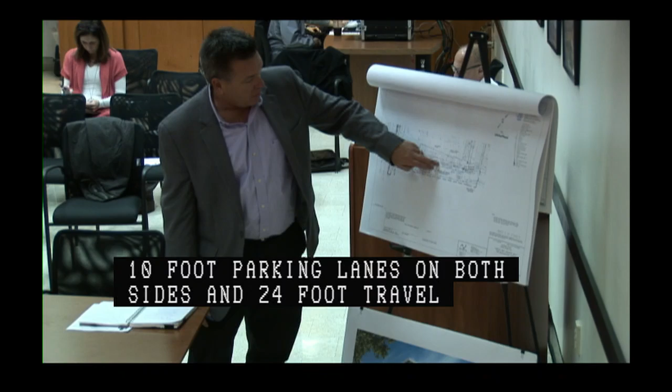John, can you talk about what the widening and relocation will allow with a little more detail? So in Fidelis Way, once we widen it, we will have about 38 feet of pavement, curb to curb. We allow 10-foot parking lanes on both sides and a 24-foot traveled way along the main drag. We are proposing on-street parking along our parcel and maintaining the existing parking on the abutter side, introducing some bump outs and other landscaping improvements. We'll have a concrete 6-foot wide sidewalk, and behind that, outside the private way, a series of landscape improvements and street trees.

Todd, since this is a private way open to public travel, I'm going to assume abutters on both sides of Fidelis Way have access to the fee ownership to half the street. Should the other side of the street be part of this petition, because this artificially changes the center line of the street? The BHA is the owner on the other fee side. So between the two petitioners, they cover the full limits of the center line of the street to the limits of what is being asked.

Other questions or comments on the widening and relocation? Todd or Avi? Members of the public? All right, I'll entertain a motion on this item. Make a motion to approve the joint petition by Avalon Bay Communities Incorporated for the widening and relocation of the existing right-of-way lines in Fidelis Way, as read into the record by the chair. All in favor? Aye. So moved.

Moving on to our next item, a joint petition by Avalon Bay Communities, Inc. and the Roman Catholic Archbishop of Boston for the acceptance of a pedestrian easement adjacent to Washington Street, a public way in Brighton, on its northeasterly side at address numbers 139-149 between Fidelis Way and Monastery Road. This was new business on November 7th, 2019, shown on a plan entitled City of Boston Public Works Department, Engineering Division, Pedestrian Easement Plan, Washington Street, 139-149 Washington Street, Brighton District, one sheet dated September 17th, 2019.

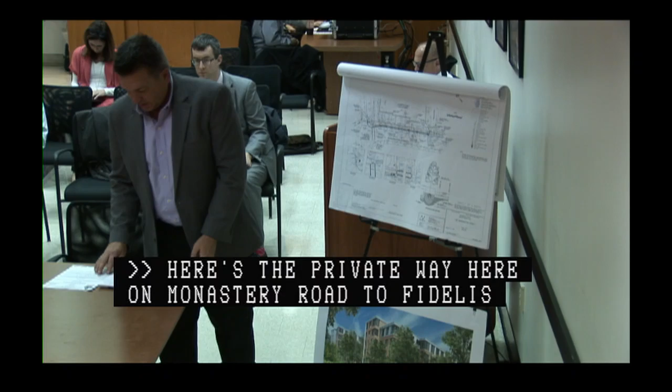This widening, this pedestrian easement, will run from the private way here, Monastery Road, to Fidelis Way, which is the private way. It's a 3-foot wide pedestrian easement, and this will allow us to reconstruct public sidewalks to allow a 13-foot sidewalk, 8 feet of which is concrete, and 3 feet will fall within that pedestrian easement. A 5-foot pervious tree pit along the edge of the curb line, and various other street improvements.

John, are there any bus lines that go down this street? Any MBTA bus lines? There are bus lines.

The reason I ask, obviously, is so that if there are any bus shelters needed to accommodate your clients, give some thought as to the appropriate location of a bus shelter that may be part of your project. I'm going to assume you are building new buildings over here or repurposing stuff.

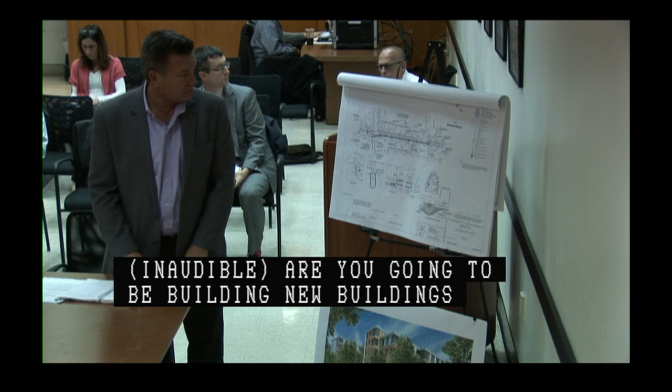Yes, we're building new buildings. Okay, so therefore you do have some room. So think about who your clients are, their vulnerability and needs for public transportation, and if they are temperature sensitive, meaning my age, I may need some shelter, so give it some thought.

I think as part of our community benefits package, there was, through the BPDA, some improvements to some bus shelters in the area. I don't think it was identified to do a new bus shelter, but the thought pattern can be, figure out where the most convenient bus shelter or bus stop location is, where stops can be consolidated, since adding one messes up travel times. So sometimes you can just adjust the location of a bus stop to have a shelter.

Other questions or comments on the ped easement? Any side items? Members of the public? All right, I'll entertain a motion on this item.

Make a motion to approve the joint petition by Avalon Bay Communities and Roman Catholic Archbishop of Boston for the acceptance of a pedestrian easement adjacent to Washington Street as read into the record by the chair, as shown in the plan entitled City of Boston Public Works Department, Engineering Division, Pedestrian Easement Plan, Washington Street, 139-149 Washington Street, Brighton District, one sheet dated September 17, 2019. All in favor? Aye. So moved.

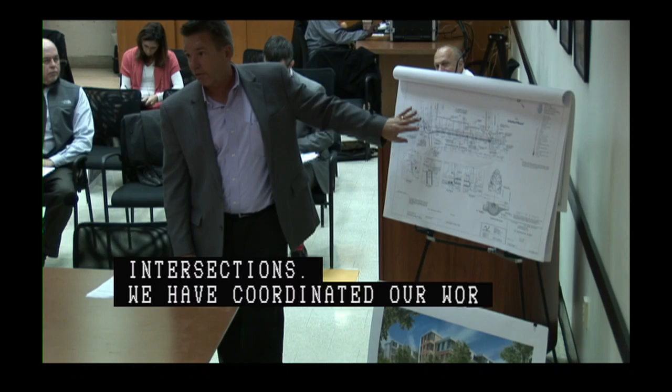5 feet of pervious pavers with a series of 6 new street trees, some minor street light relocation, and accessible crosswalks at all the intersections. We have coordinated our work with the work that's been previously approved by this board for the Cabot Fords project. That's all been coordinated and respectful of each other.

In regards to Fidelis Way, the private way, we are widening Fidelis Way on our side to provide on-street parking, as well as maintaining the existing parking on the other side of Fidelis Way. We have a concrete sidewalk that will run along the curb line, and we have a garage entrance here where we maintain a flush concrete sidewalk along the sidewalk.

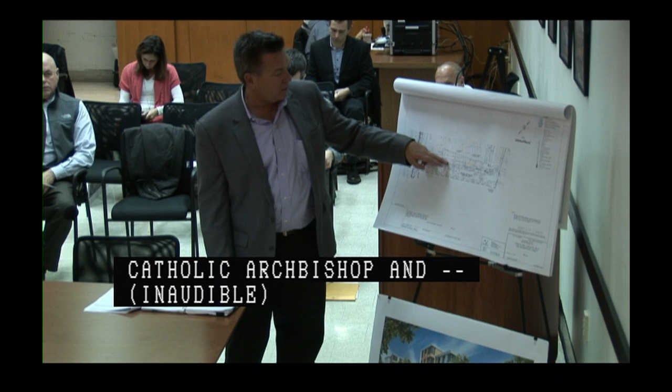And then at the intersections of the driveway that will serve the project as well as the BHA, we have a flush concrete sidewalk there too, as requested by the city.

We have some landscape tree improvements that fall outside the right-of-way, not street trees in the right-of-way. This has been reviewed and blessed by the BPDA, Parks Department, and Disabilities Commission.

John, you mentioned parking on the private way. Is that the right of the private way, not the city's, since we're not regulating or enforcing it? Correct, it's a private way. But are they deeded spots? I don't believe they're metered or deeded, so any person can park there, but the enforcement and regulation of those spots, unlike the spots on Washington Street, is yours.

Well, it's actually going to be the BHA's, because as part of our agreement with the BHA, we agreed to build those spaces but then sign them for BHA residents only, and all of our parking will occur within our building.

On Washington Street, what is the loading characteristic? Are you going to have on-street parking there? Guy Booth, Howard Stein Hudson, could you repeat the question? Do you have on-street parking on Washington Street? Oh yeah, Washington is currently Brighton neighborhood resident permit parking. It will remain residential. We're maintaining that.

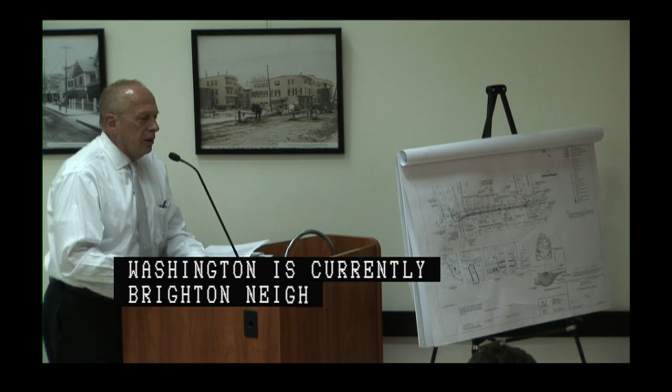And all the loading for the building occurs on site? Yes.

John, has the maintenance agreement been executed by the Archdiocese or the BHA? Who do we have the agreement with? So the license agreement will be with Avalon Bay.

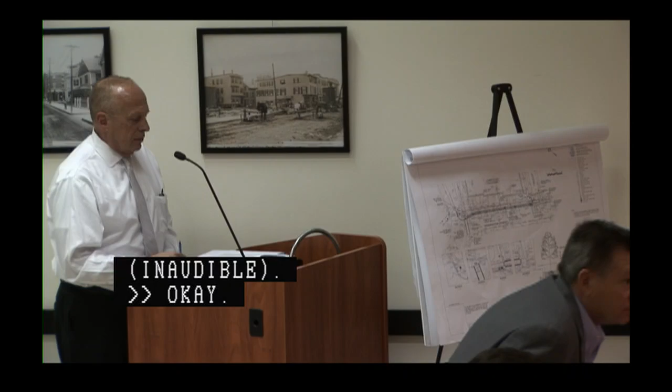I'll entertain a motion on this item. Make a motion to approve the joint petition by Avalon Bay Communities for the making of specific repairs within the following roadways in Brighton, Washington Street and Fidelis Way, as read into the record by the chair and shown on a set of plans entitled City of Boston Public Works Department, Engineering Division, Specific Repairs Plan, 139 Washington Street, Fidelis Way, Brighton, 3 sheets dated September 2019. All in favor? Aye. So moved.

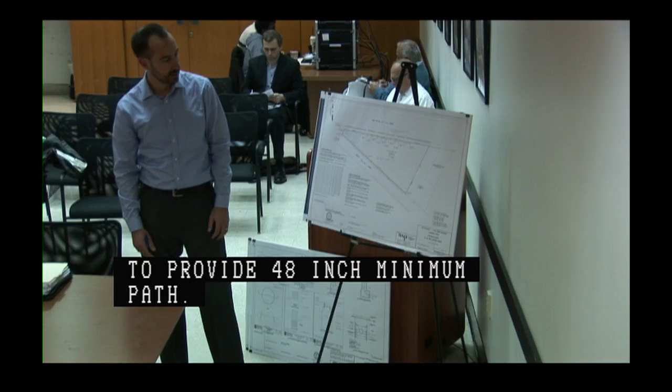The Athens Street pedestrian easement is basically to provide accessible width for the pedestrian path, maintaining the existing edge of pavement along the project, continuing to face the curb from the adjacent property, as well as the curb at the intersection, in order to provide a 48-inch minimum wide accessible path. We're providing an accessible easement on the property to achieve that. And then along West 2nd Street, where we have some trees proposed along the project frontage, we want to provide an increased accessible path up to 5 feet.

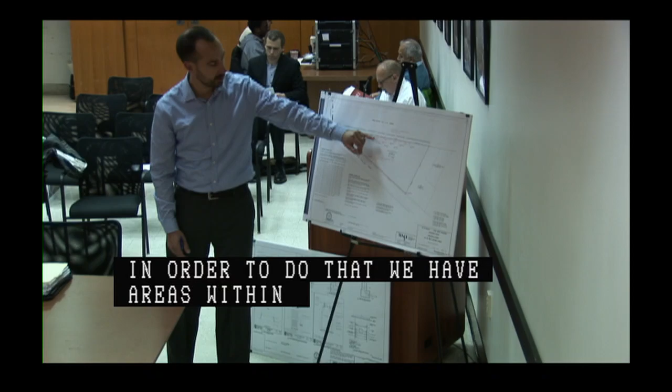So in order to do that, we have areas within the recessed part of the building where we have a sawtooth pattern, and we're providing a pedestrian access easement to provide 5 feet of continuous accessible width in those areas.

Sarah, I will defer to your expertise, but the part which I will disagree with you ever so slightly is that it is not a continuous 5-foot path, because if I walk that thing and if I'm blind, I'm going to hit my head 5 times with the sawtooth. So it is not a continuous path. But are you okay with it, Sarah?

Just to clarify, there is no building component that you're walking beneath in those areas where we're providing the access. I didn't see that clarification, so my bad. The tree pits are what bump out, right? The tree pits here along the frontage in the right of way are 3 feet wide as opposed to the continuous 2-foot band that we have. So walking along that pathway, that is the building. Correct. Okay, so the easement which you are giving us is not continuous. It would provide a continuous path, but it would be a meandering continuous path. That is, for a visually impaired person, as long as that's fine.

Yes, so Sarah Leong, Disabilities Commission. We work with the proponent as well with the BPDA and the Parks Department to ensure that there was an accessible path along the sidewalks and also accommodate parks requirements for tree pits. So it was a collaborative effort to find that extra space on the sidewalk.

Other questions or comments on the pedestrian easement? So I think this was addressed, but I just want to refresh my memory: is at the intersection of Athens and Second, there's a crosswalk there, correct? There is, yes. All right.

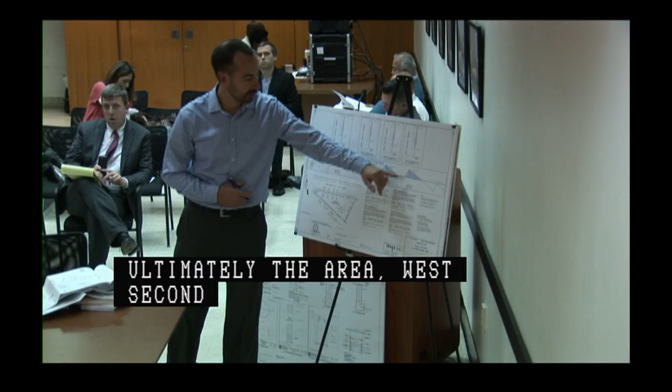The grade falls as you move westbound on West 2nd Street with a head height of 10-foot minimum at this location, increasing to a head height of 12 feet at this location. Fairly straightforward, four small encroachments, each of which are about 11 to 12 square feet each for a total square footage of about 45 square feet.

I just want to make sure we are meeting our standards, that it does not exceed our maximum standard for overhang on the sidewalk. Yeah, it's less than, all of them are less than 2/3 to the sidewalk.

Okay, and can you just show the rendering again, just to walk us through what the red sections are? Sure. So what you have here behind the trees, you have these 1, 2, 3, 4 undulations, I believe, that'll partially hang out for a distance of about 3 feet, which is roughly this wide, out to the public right of way.

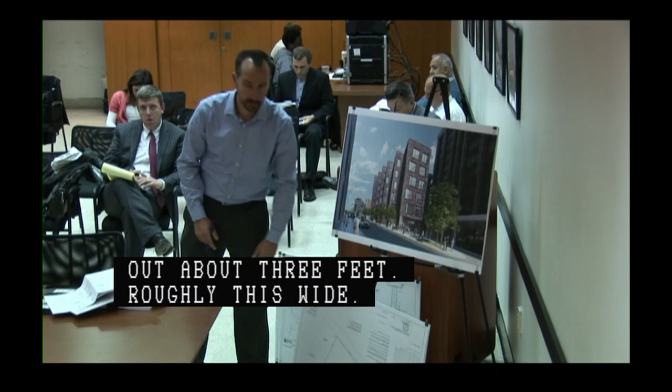Other questions or comments on the vertical discontinuance? Todd, Robbie? All set. Good. All right, members of the public? All right, I'll entertain a motion on this item.

Make a motion to approve a joint petition by Zero Athens LLC and the Boston Planning and Development Agency for the vertical discontinuance of portions of West 2nd Street, as read into the record by the chair and as shown on a set of plans entitled City of Boston Public Works Department, Engineering Division, Vertical Discontinuance, 21-35 West 2nd Street, South Boston, one sheet dated July 11, 2019.

Second. All in favor? Aye. So moved. Moving on to our next item, on a petition by Zero Athens LLC for the making of specific repairs within the following public ways in South Boston, consisting of curb and sidewalk reconstruction, as well as new and relocated specialty pavements, street trees, storm drain infrastructure, and driveway curb cuts.

Locations are West 2nd Street on its southerly side at address numbers 21-35 east of Athens Street, and Athens Street on its northeasterly side southeast of West 2nd Street. This was new business on November 7th, 2019, and this is shown on a set of plans entitled City of Boston Public Works Department, Engineering Division, Specific Repairs Plan, Athens and West 2nd Street Apartments, 21-35 West 2nd Street, South Boston, 3 sheets dated October 3rd, 2019.

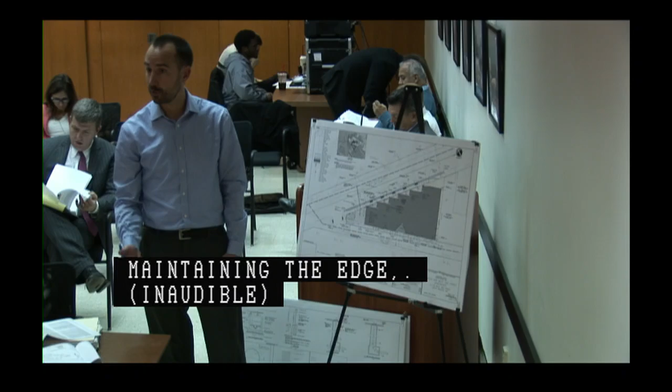We're maintaining the edge of pavement along this edge, installing new vertical granite curb where there currently is none. Under existing conditions, it's essentially just one wide open parking lot entrance with no curbing, no delineation for access. We're formalizing that with new curb, new sidewalk, with 2 flush curb entries into the loading area, as well as a small parking area in the rear, flush access to those locations.

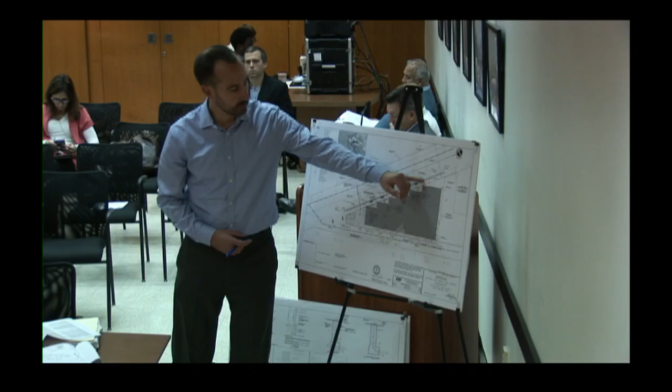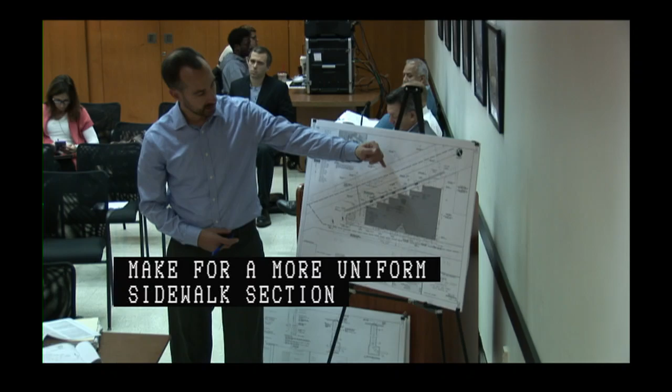Along West 2nd Street, we're proposing to remove and reset the existing granite curb. Right now, there's one existing driveway entrance into this entirely paved parcel today. We're going to be closing that off to make for a more uniform sidewalk section along the frontage there. As we briefly touched on before, there's going to be a 2-foot wide impervious paver strip continuous along the frontage. We're proposing 5 new street trees, as well as a landscaped area on the private property at the tip of the project.

Again, it's going to be a continuous ADA accessible path with a 5-foot minimum along the frontage, providing entrance access into the residential component, as well as a commercial space located roughly in this portion of the project. There's one entry there, one entry there, all continuous ADA access along the frontage.

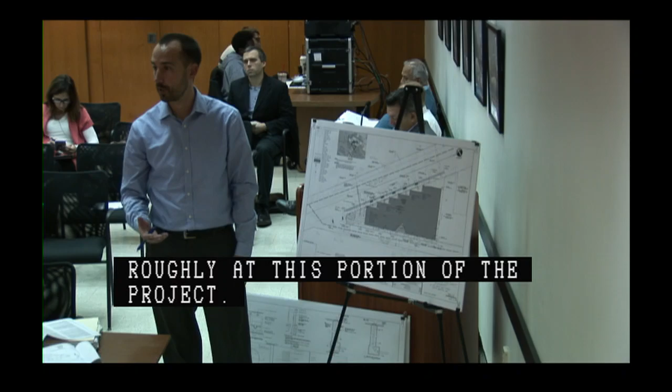We also heard from Boston Water and Sewer Commission just here today. They had one minor comment, and they're going to be ready to sign on the plans too, so they're comfortable with the design that we have.

From a stormwater perspective, we did touch on it last time, but we do have a distribution pipe running along the frontage of the site that provides stormwater to on-site recharge facilities located on the private property, designed to meet the Boston Water and Sewer Commission requirements.

We touched briefly last time on the alley on the eastern side. What sort of gate are you using? I don't know if the material's been picked yet, but there would be gates at both sides purely for maintenance access. It would be closed off, so it wouldn't be accessible for the public to walk through.

Again, we talked about is it 55 units? 55 units, no parking other than 2 zip cars. Can you just go over the public process on that? It's not necessarily a zip car because it's for the building itself, so it's a private car share service only for the residents. It wouldn't be publicly accessible.

During the process, because of the unique site constraints and concerns about being able to fit any cars in there, this was seen as an alternative that was discussed at length with the neighborhood and the community. Ultimately, given the site constraints and the location directly around the corner from the Red Line train station, the car share service was approved and supported by the elected officials and by the mayor's office.

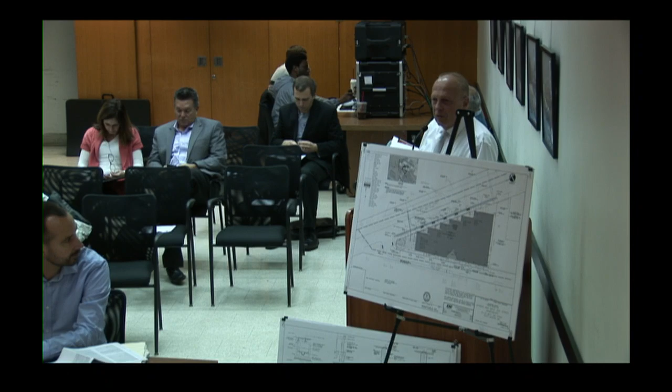I think I asked this last time — the construction management plan, we know we have to do it. That's one of those items we'll prepare as we move forward and submit for the record. Who's preparing that? Howard Steinmetz. Mr. Busa, anything to add? No. You were supposed to say it'd be in 3 days — Mr. Hesford will have it in his hand. We're working with Neil and his group on a construction schedule, and that's the last thing we're waiting on before submitting it to you. So it's pending. Thank you, sir. Thank you.

Other questions or comments? Todd Robbie? All set. Members of the public?

I'll entertain a motion on the specific repairs plan. Motion to approve the petition by Zero Athens LLC for the making of specific repairs within the following public ways in South Boston, consisting of curb and sidewalk reconstruction, as well as new and relocated specialty pavement, street trees, storm drain infrastructure, and driveway curb cuts, as read into the record by the chair, and shown in a set of plans entitled City of Boston Public Works Department Engineering Division Specific Repairs Plan, Athens and West 2nd Street Apartments, 21 to 35 West 2nd Street, South Boston, 3 sheets dated October 3rd, 2019, with the caveat that we'll formalize a MOU on the resident parking restriction and provide the CMP. Second. All in favor? Aye.

So moved. Moving on to our next item, a petition by Zero Athens LLC for the granting of a projection license for the installation of a canopy over a portion of West 2nd Street, a public way in South Boston, on its southerly side at address numbers 21-35 West 2nd Street. This was new business on November 7th, 2019, and is shown on a plan entitled City of Boston Public Works Department, Engineering Division, Canopy License, Athens and West 2nd Street Apartments, 21-35 West 2nd Street, South Boston, one sheet dated October 3rd, 2019. Again, Carlos Sculti with CEC for the applicant. So what we have here is a canopy, 5 by 8, essentially at the residential entrance to the project, at the easterly end of the building. It projects approximately 3 feet out into the right of way, provides 11 foot... 10 feet of clear space below, and is pitched backwards towards the building. The drainage will be routed internal to the building, and it's going to be heat traced as well.

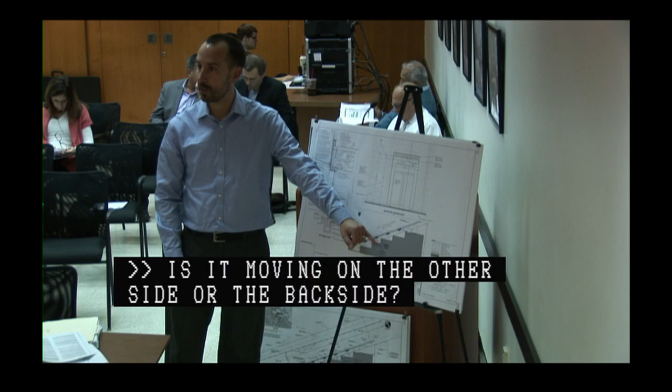All moving in and out of your building deliveries, is it from the main door or do you have a side entrance from the back? Deliveries, if I'm moving into the building, furniture coming in — the loading will be from the managed backside. So this is primarily for people just coming into the building.

Questions on the projection license? Todd Robbie? Members of the public? All right, I'll entertain a motion on this item.

On agenda item 8, I make a motion to approve a petition by Zero Athens LLC for the granting of a projection license for the installation of a canopy over a portion of West 2nd Street, as further described and read into the record by the chair.

All in favor? Aye. So moved. Thank you so much. Thank you.

Moving on to new business, our first item, citywide adoption of a policy for climate resilience on a joint petition by the Boston Planning and Development Agency and the City of Boston Public Works Department.

Good morning, my name is Katie Cho, I'm the Chief Engineer for the Public Works Department. Joe Christo, Senior Resilience and Waterfront Planner at the BPDA. As a Climate Ready Boston initiative, we are here this morning to ask the Public Improvement Commission to adopt a policy for climate resilience.

Climate Ready Boston is the city's initiative to develop resilient solutions to prepare Boston for the impacts of climate change, rising sea levels, extreme heat, and weather events. Identifying impacts that involve the public right-of-way is a critical first step in implementing the Climate Ready Boston vision. The policy for climate resilience arose from the development of the City of Boston Resilient Design Standards and Guidelines for the protection of the public right-of-way.

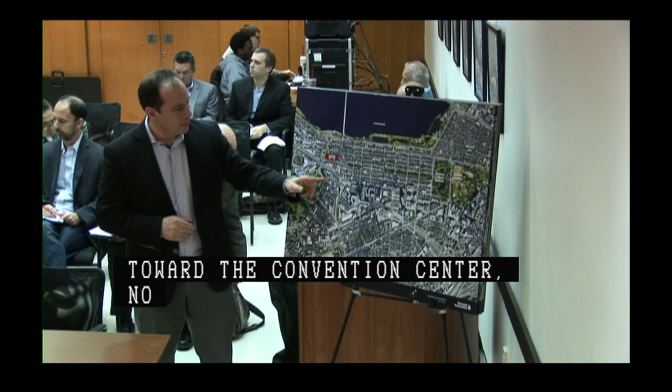Parcel 12 is one of the BRA's projects in the Back Bay. I'm sure you're familiar with Parcel 15 further up towards the convention center, not related to this project, and Parcel 13 as well. Parcel 12 is the air rights bounded by the west side of Mass Ave, along Boylston Street, Mass Ave, and Newbury Street.

This is a project we've been working on since 2012. It's probably the most complicated and important project we've ever undertaken. It is located along 3 of the most important streets from the perspective of connectivity and pedestrians, Newbury Street being one of the most important pedestrian streets in the city, and Boylston Street also being such a critical link. So when we undertook to develop this project, we were focused on connecting these neighborhoods together by filling in these barren streetscapes.

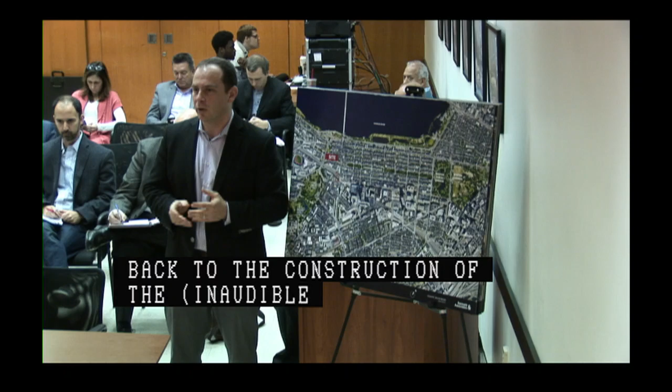Over the course of the last 7 years, we've come to realize 2 things that have really influenced the project. Number one, all of the infrastructure that surrounds this site really dates back to the construction of the Mass Turnpike. It works for cars, but not for pedestrians, T customers, bus users, bicyclists. So we've spent a tremendous amount of time and energy with BTD, with Mass DOT, with MBTA, trying to figure out how to rebuild all that infrastructure to work for everyone.

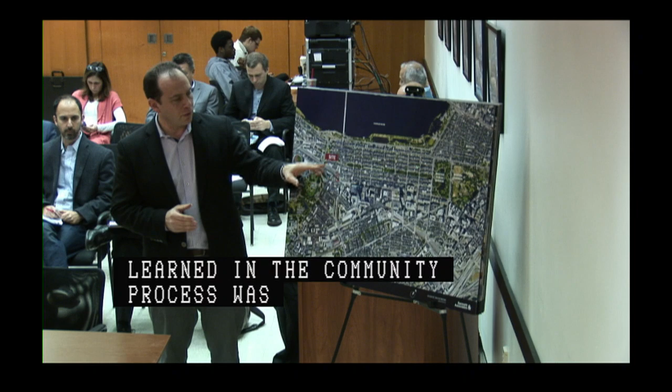The other critical thing that we learned during the community process was that there was a desire for some civic space along this stretch of Mass Ave at this point in the city, and so we ended up redesigning the project through the Article 80 process to include a half-an-acre plaza and elevated parking.

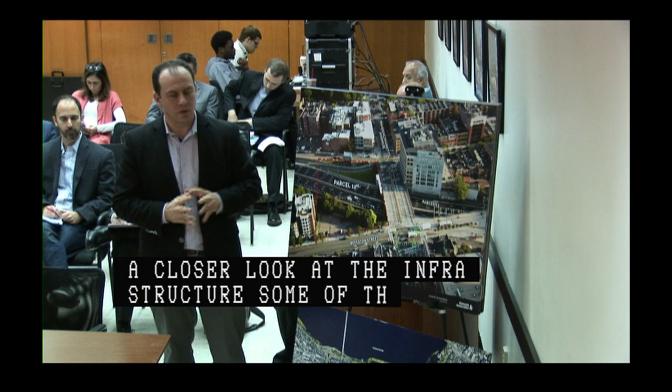Just a little closer look at the infrastructure, some of the challenges we have here, and the city actually raised this issue for us to consider early on in the conceptual stage, is that the intersection of Mass Ave and Newbury Street really is broken, and it all relates to the presence of the existing highway ramp at this end of Newbury Street.

After we'd gone to the community, before we filed for Article 80, there were 2 pedestrian fatalities that occurred out here, and it is one of the most dangerous and worst intersections in the city.

Through work with the city, the state, and ourselves, we took on the obligation to build what is a DOT proposed project, which is to reconfigure this highway ramp and push it further away from the intersection, making the scale of this piece of Newbury Street feel more like the scale of this piece of Newbury Street, narrowing this crossing from about 72 feet to about 30 feet. That was a fundamental piece of infrastructure reconfiguration we needed to accomplish.

We also worked a tremendous amount with BTD on the number 1 bus line, providing accommodations for it, and reconnecting T-access to the Hynes Convention Center by creating a new head house to an existing pedestrian tunnel underneath Mass Ave. We were also very focused on Boylston Street, though most of the transportation issues really relate to Mass Ave.

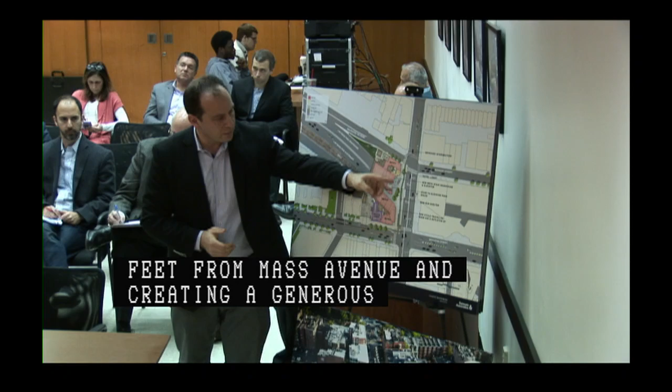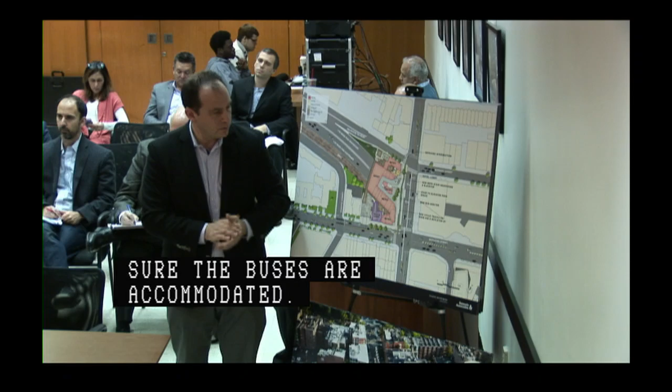This is a ground floor plan of the project. You can see we've shifted the building back about 40 feet from Mass Ave, creating a generous bus station with ample room for buses along Mass Ave. We've had a ton of conversations with BTD about that configuration to make sure the buses are accommodated - a bus station, a protected cycle track inboard of the bus station, with measures to keep pedestrians and bikes separated, and a generous pedestrian zone and plaza activated by great retail to pull people around Newbury Street and around to Boylston Street.

Stairs lead up to a plaza, to a park on the roof of the retail. About half of the public space is at the ground level, about half is over the retail, and what the community really pointed out is that there are some amazing views towards the west. There aren't many places in the city where you have an uninterrupted western view.

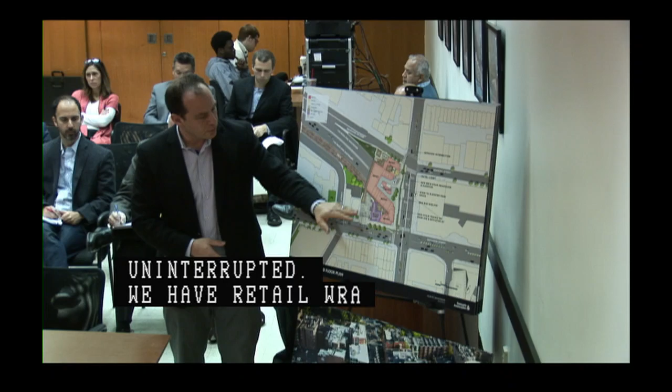We've got retail wrapping around Boylston Street, our lobby on Boylston Street, and our loading dock and garage entry on Boylston Street. We've also worked with the city to figure out how to make Boylston Street work and to create cycle accommodations and generous sidewalks there as well.

On Newbury Street, what you see here - the highway ramp that now begins here has been shifted further down to the end of Newbury Street. The scale here matches the scale of Newbury Street, and what we're really trying to do is prevent people from speeding through that intersection.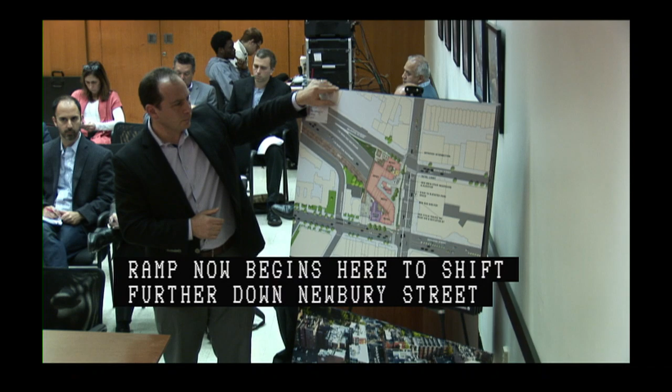This is a view from the end of Newbury Street. The highway ramp is essentially where this building is today. This building has been really studied, working with the community, BCDC, and BPDA staff to come up with a design that is worthy of this location.

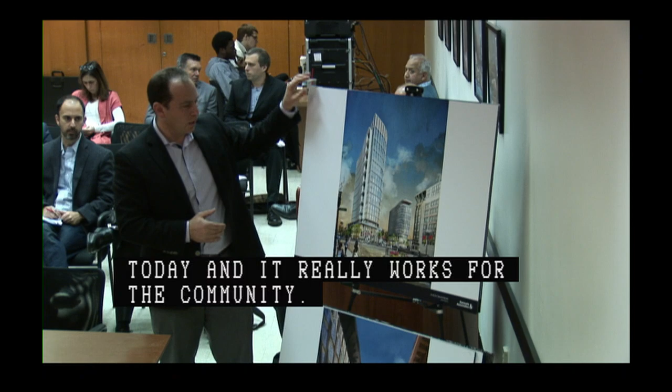This is a view from Boylston Street, looking to the west - the office building, the hotel building, and the plaza. The building also serves as a gateway from the west. So with that, I'll turn it over to Brian to walk through some of the technical drawings.

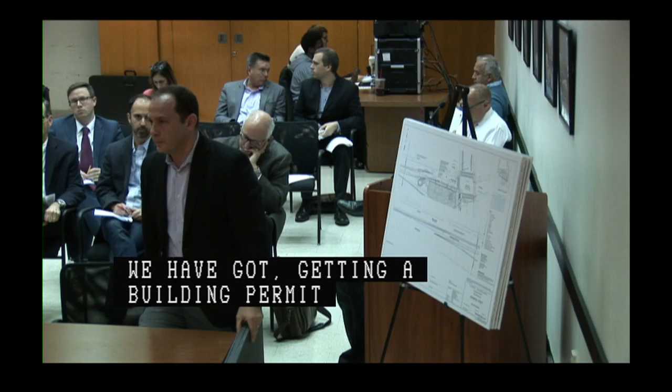What's the rough timeline? We're moving really rapidly on this - getting a building permit application in this year, with a goal of starting construction in the first quarter of next year. Roughly, construction is expected to take about 28 months.

Do you have approval from the Federal Highway Administration and/or MassDOT for the exact location of that on-ramp? Yes, the FHWA has approved the ramp reconfiguration and the location. We've submitted stages 30, 60, and 100% to both the city and the state for technical review of the ramp and all the infrastructure. We've just received comments on our 100% design with DOT and are working through some of the last remaining issues.

Next question - if you're going to the Harvard Club, that's the backside, and there's a huge parking lot. So if I'm coming out of the parking lot, will I be able to access this on-ramp?

No, we've met with the Harvard Club. Not to speak for them or any ideas they may come up with, I think given their location, you need to design it so that someone coming out of those parking lots isn't going to shoot out into traffic. Your team needs to understand that has to be handled sensitively.

The bridge structure itself, the Boylston Street bridge structure, is also DOT - I'm going to assume we have all their approvals. Yeah, that's an MBTA-owned bridge, the Boylston Street bridge, marked on the top.

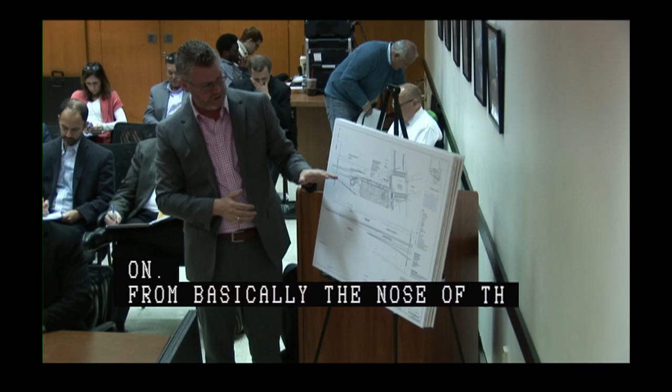I think it's important to note that the existing parking that's there will be removed. There will be no parking on this stretch of Newbury Street from basically the nose of the relocated ramp to Mass Ave. As part of what we are proposing on Newbury Street, there's about 10 feet from the proposed building, which is all within the air rights property, to the curb line that we're proposing along Newbury Street.

In that zone, it's kind of a tricky area, we've been asked that it wants to still look like Newbury Street, but we also have to be mindful that we're approaching an interstate ramp. So we've been asked to add a furnishing zone that has a raised planter that will have trees in it, and it will have certain elements that look like a city streetscape, but we've been asked to have it be something that doesn't promote people to pull over there, or to park there. Some of the finer details of that haven't been fully worked out yet.

The Mass DOT has asked for some sort of a barrier, not exactly, it may be a fence, it could be a railing. Not something that needs to be crash-proof, but something that deters people, or Uber or anyone, from stopping in this area. And the one other important thing to note: the existing MBTA vent building, we are maintaining pedestrian access to the front of their building so that they can get into the building from the outside as they do today.

And Brian, no T-service vehicles though would be parking there or along that area. We found an alternative way to accommodate. Correct, that's still being worked out with the MBTA and Mass DOT, but no, we are not proposing any parking on the south side of Newbury Street dedicated for them.

Reason being that when they're not there, we couldn't really prevent other people from stopping there. Just to note there's a lot of maintenance that goes on there, trucks. Also they have a billboard on the head house that gets serviced all the time, so those things need to be thought about. We've had a lot of discussions with them, and we have some alternatives for access that we're working through with the T.

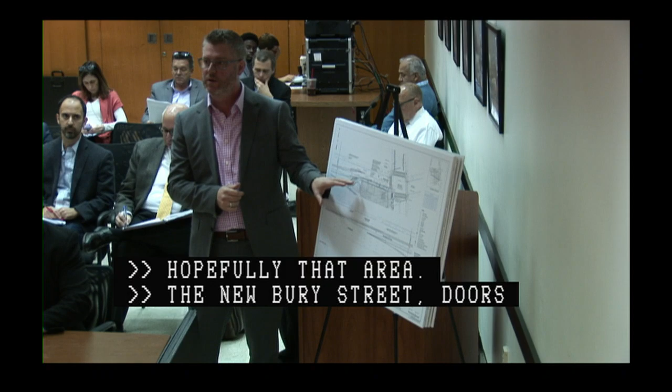Along our Newbury Street frontage outside of the doors for the existing vent building, there are two doors on the western end of the building, but those are for emergency egress only. They're not main doors. There are no retail doors, and no hotel doors on the Newbury Street frontage.

So with that, what happens at the far west end, to that last point? If you progress down that sidewalk after the MBTA entrance, what will happen? Hopefully I will see an alligator pit or something.

So I would say what we've noted on the drawings is that there's a design intervention that's required, subject to city and state approval, but we're envisioning that there could be some sort of railing that prevents access beyond that building.

And also the furniture company across the street, they have a loading dock, they back in, load, just about where that ramp is. Yeah, there's an alley here that's where.

So have you had conversations with them? We had met with them early on. We don't think that we're precluding any access to that existing condition. Obviously that loading occurs now, currently. Yes, right, before, after the on-ramp.

This now will be in the on-ramp. So the Federal Highway Administration needs to sign off on that because this little bit is on their limited access part. So all the access agreements should be codified with them, because if something should happen over there, it's not going to be the city.

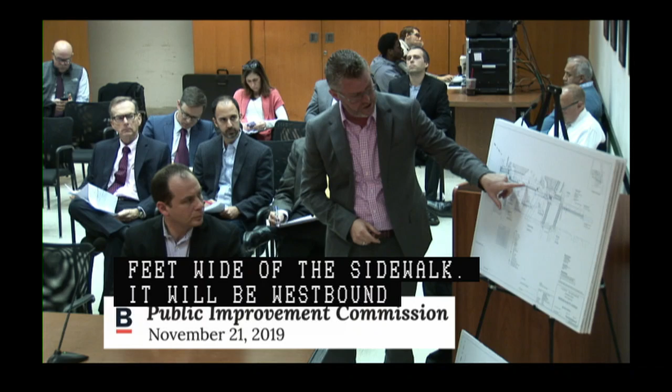And we're also proposing a very large, between 10 to 15 feet wide, new public sidewalk that'll be westbound of the cycle track. There will be a new bus shelter proposed to replace the existing one there today. And we're not physically touching the Mass Ave bridge, so the bridge and sidewalk that are there today will remain, but we're providing additional sidewalk space to the west side of that cycle track.

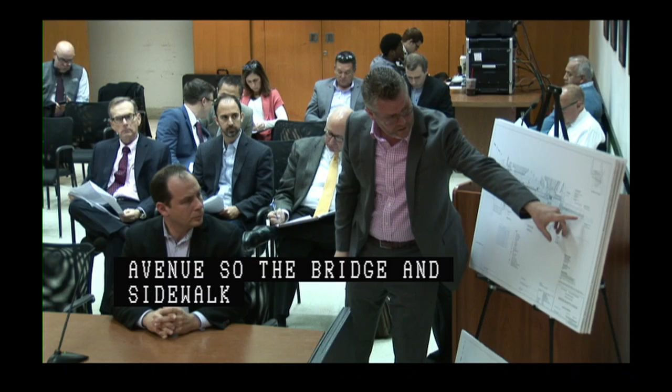It's worth noting that on this, we have been asked through numerous rounds of coordination with BTD and BPDA to look into connecting to the existing raised cycle track that's in front of the Eliot Hotel, so that'll continue that walk from Commonwealth to Newbury.

And again, we will be improving that entire intersection, so there'll be upgraded signals that we've just begun working with the signals group at BTD on, and we will be replacing the accessible ramps in all four corners of that intersection.

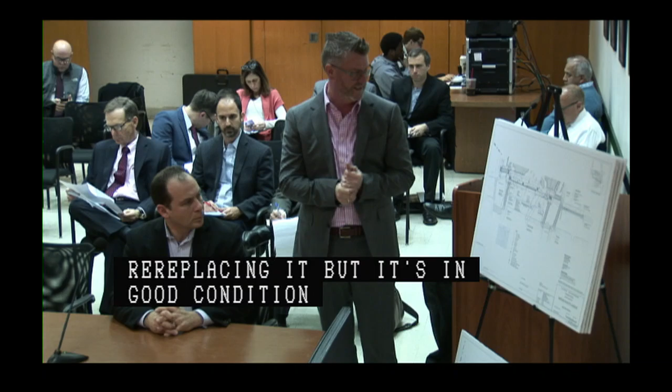It's worth noting on this particular intersection, there's not room to provide separate ramps that we are proposing to. We are replacing the existing apex ramp that's there today, but it's in good condition. And again, we've had a lot of meetings with BPDA and BTD on this, and public works, and disabilities groups, you name it.

So coming around the side, we are extending the improvements all the way down to the Boylston Street intersection. Keep in mind the majority of this is over the DOT bridge, so what's happening along Mass Ave is only right here, and although it isn't part of what we're here for specifically, this is where the new head house will be to get down into the existing tunnel over to the Hynes Convention Center.

So this will be where we have about 180 feet of bus zone that's being dedicated, and the remaining 40 feet will be for pickup drop-off. That has gone through many rounds of comment. At one point in time, the drop-off was at the front, now it's at the Boylston Street side. It used to be the bus lane was a little less generous, but based on comments we've received, we've increased it to the 180-foot length.

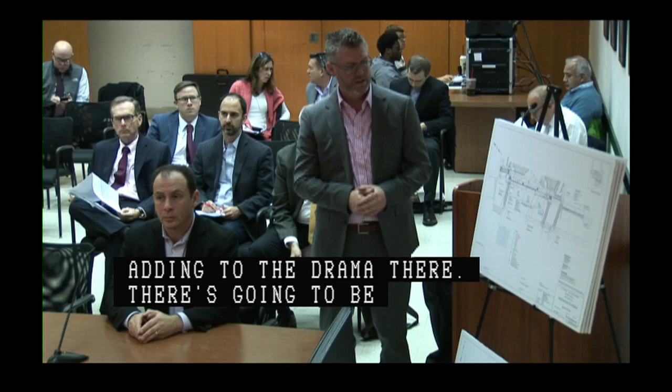So they're not going to be concurrent anymore. There's going to be separate phases for right turn vehicles. That's the other part which doesn't show on this plan. Today there are 2 through lanes on Mass Ave heading southbound. Part of what's being done for what's in front of the Eliot Hotel and the extension of the cycle track is that we are providing room for a right turn lane on Mass Ave.

Will you have enough queuing capacity now, because some parts of Cambridge empties because it's the closest on-ramp to get on I-90, so there's heavy right turn traffic. Now the fact that you are giving it as a protected movement only, meaning you can only make a right turn on a green arrow, is there enough queuing capacity between Newbury and ComAve for that volume of traffic? Because if it spills over, you are going to create a bit of a situation through southbound traffic on Mass Ave.

So we're currently coordinating that with BTD Signal Group. We met with them a couple weeks ago, and the analysis is still going on for those types of things. Basically, what you may have to do is synchronize the operations of this light with what's happening at Mass Ave, ComAve, so that the movements are not going to jam into each other. And I do know through our meeting with them, BTD Signal Group is looking at the re-signalization of the entire Mass Ave corridor.

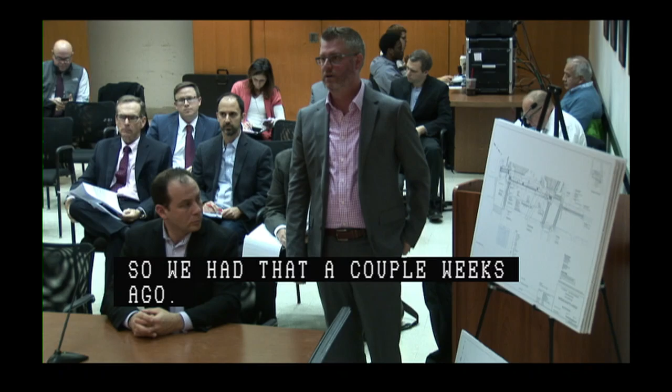So just on the plaza area, it's mid-block. Obviously there was a concern that has been raised many times about mid-block crossings, illegal crossings. Am I right in seeing that the bus shelter will basically be acting as a channelizing device to get them to go to the intersections? Correct.

There's a planter being planned here, a small planter over there, and numerous bike racks that are strategically located so that we're trying our best to funnel and channelize people, not only just crossing Mass Ave itself, but also pedestrians crossing the raised cycle track. So these are the 2 locations from the center plaza that we're trying to channelize pedestrians to go around the bus stop to be able to then be on the east side of the cycle track to wait for buses.

And you'll be glad to know that Mass DOT just installed the new ramps at Boylston and Mass Ave. So we appreciate that. Thank you, Mark. Other questions on the Mass Ave side?

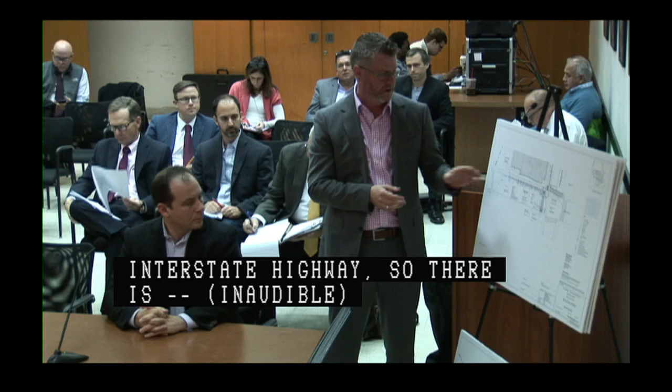Go ahead. Boylston Street. Now, on Boylston Street, this side I think is a little bit more looking like a typical city street, that we're not over a bridge and we don't have an interstate highway. So there is an existing curb cut there today that we will be closing or modifying in order to accommodate our building. So today on Boylston Street, there's a small surface parking lot that will be removed for the office building that you see here.

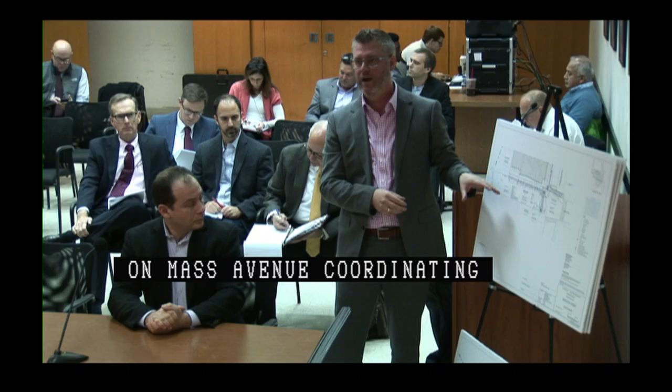Within along Boylston Street, we are proposing a pickup drop-off zone. A lot of that used to be on Mass Ave, and due to coordinating with how much room the bus needed, a lot of that got pushed over to the Boylston Street side. So we'll be providing an accessible loading area, and the rest will be for pickup drop-off for the office, the hotel, and all the retail space.

Throughout here, from the curb in, we're providing a paver furnishing zone with street trees, then a 5-foot wide raised cycle track. As you head towards the property line, we're providing a city standard sidewalk 8 feet wide minimum. Then from the property line in, there's an additional 7 to 15 feet, depending on the undulation of the building. So these are very generous public sidewalks that will be occurring along Boylston Street.

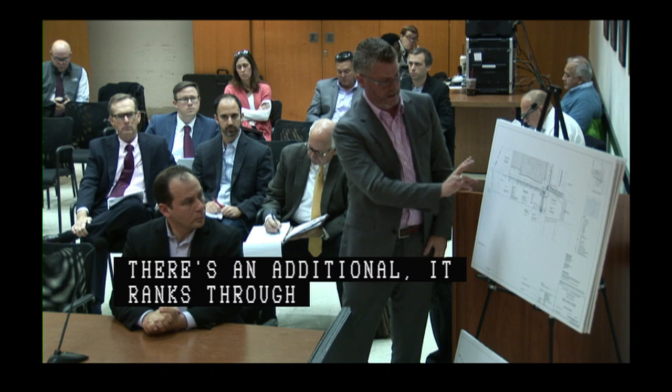To the west is where our garage loading will be, as well as the garage entry and exit, and also where the loading facilities will be. These were placed where they are to be as far away as possible from the Mass Ave Boylston intersection.

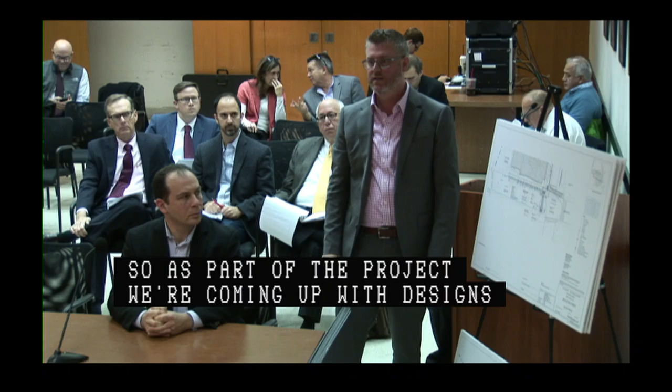As mentioned previously, today there is not a ramp at all on the east side of Mass Ave, so it's not accessible. As part of this project, we worked with DOT and the city on coming up with designs to add a pedestrian ramp on the east side of Mass Ave. It's a little tricky because it's on a bridge structure, so it's not as easy as it would be otherwise.

Based on coordination with BPDA and BTD, we're doing improvements on the south side of Boylston Street, providing a protected area to separate cyclists and pedestrians crossing Boylston. This entire intersection, from Mass Ave to Boylston, has been designed as a protected intersection, providing as much separation as we can between pedestrians, cyclists, and vehicles.

Speaking of cyclists, currently there's a bike station along that road. As it stands now, we're taking the one that's there and relocating it onto Mass Ave, so it's not moving far—only about 50 feet away from where it is today.

A couple of minor points. If I'm heading westbound on Boylston Street, before I get to Mass Ave, so I'm on this side—westbound, coming from the Hynes. Right now, because of your neck down, and I believe that segment of Boylston is still a two-way street on both sides, I forget what the lane configuration is for the curb lane, because if you're on the curb lane and don't make a right turn, you're going to come smack into your neck down area.

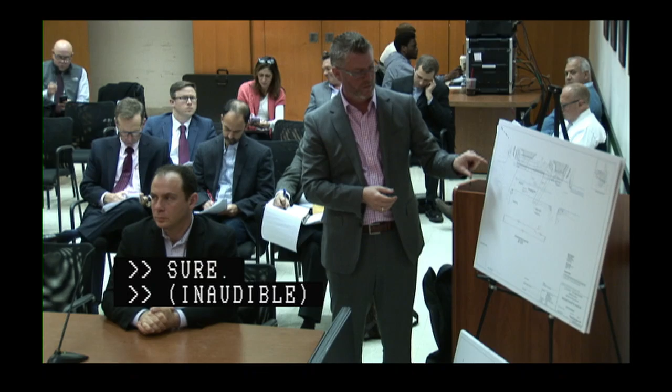Want to move on to widening relocation? Sure, so a lot of this was already explained when I went through the specific repair on Mass Ave, but this is the mechanism where we are extending the public sidewalk into the private property and the public raised cycle track. So the widening and relocation is due to accommodate city sidewalks.

Todd, do you have the widening and relocation plans? Or should I- oh, we're- my bad. Hang on. Right, go ahead. Yes, we do. Thanks.

So you are widening this street in a very charming way into private property? Is there another way of managing this situation? Reason being, this is the right-

And this action will result in a highway easement being granted to the city, but it is still a highway surface easement because the turnpike's underneath.

Can you amplify a little bit about how the street lighting system is going to be now, to support the bicycle cycle tracks that are going to be within this widened area?

Sure, so along Mass, actually, from the portion of Newbury Street that is going to be city, and all around Boylston Street and throughout Mass Ave, there are streetlights, city standard streetlights that we're proposing as part of this project.

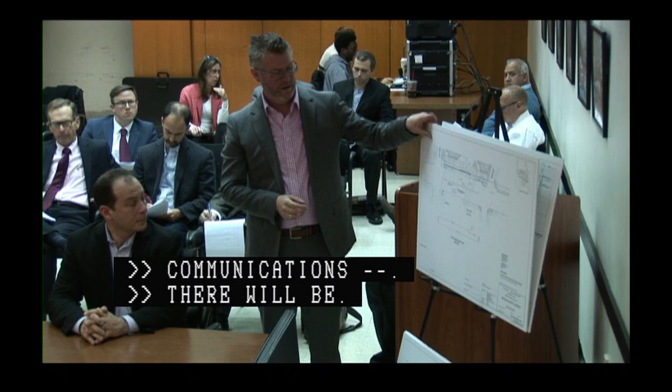Earth retention? Yep. So, lastly, let Dave take this, he'll be better suited to speak to this board. So we're just seeking sort of typical rights for earthwork-related tiebacks under Boylston Street.

Similar to what we've done with other projects, we've got a pretty constrained triangular site here, so it'd be really helpful to be able to use tiebacks along Boylston Street. They would be angled down as we've done in the past, below the utilities.

So as Mass DOT, have they basically approved the lane closures, to get your earth retention system, your structural elements into the right-of-way? Have they approved that schedule?

Yeah, in terms of the engineering of that system, we're at the 100% stage now. We've had endless meetings about earthwork design, design criteria, deflection criteria, and all of that. So our optimal design involves tiebacks on the Boylston Street side.

In terms of the lane closure sequencing and the traffic management plans, that's sort of a separate matter.

May I say it slightly differently? It is extremely difficult or inappropriate for this commission to take action over items that are on other people's properties, even though there's an impact. So it'd be really nice, and I'm very appreciative that you've had 100% closing conversations.

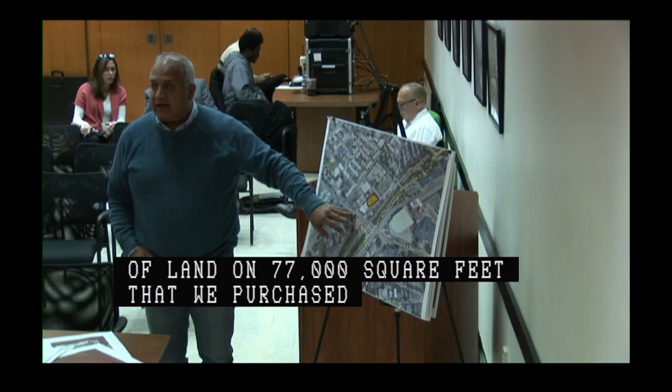Parcel 25, to give you a sense, is a large parcel of land, 77,000 square feet, that we purchased from the MBTA in 2012 after a multi-year community visioning process. The property is bounded by Tremont Street to the south, Gurney Street and Halleck Street to the west, Station Street to the north, and on the eastern side by the MBTA Orange Line and the Southwest Corridor. The Roxbury Crossing MBTA Orange Line station is located directly across the street from the site.

Currently, the Phase 2 site is a parking lot, a temporary parking lot that was developed as part of the Phase 1A project. If you turn to the third page of the handout that I provided, I want to talk to you a little bit about the phasing of the project.

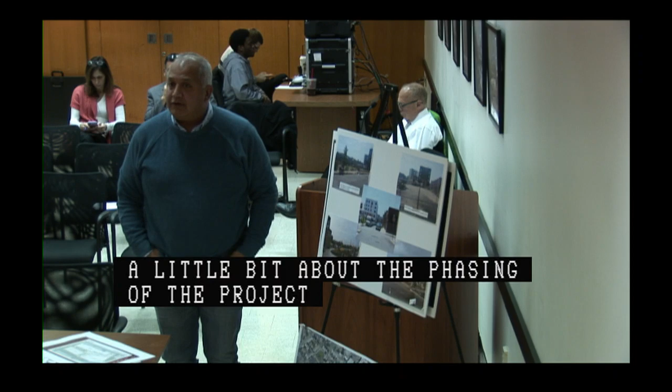So we purchased this property in 2012. We have been focused on implementing the community's vision since then. In 2015, we completed a property across the street from the Parcel 25 site called the Maria Sanchez House, which was 40 units of affordable elderly housing, low and extremely low income housing, 40 units.

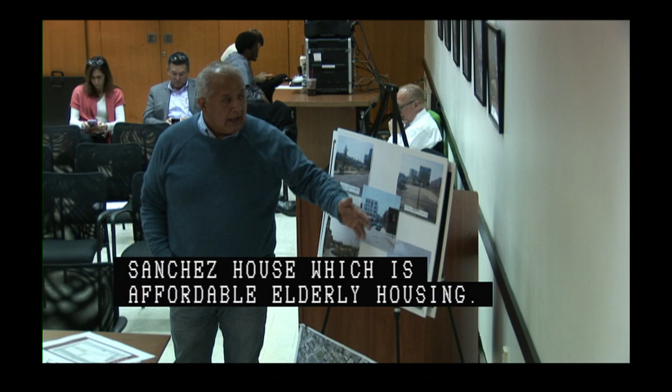In 2017, which is actually the last time we were here before you, we finished the 1 Gurney Street project, Parcel 25, Phase 1A, which is 40 units for families, also affordable rental, office space for another nonprofit organization, Metro Housing Boston, used to be MBHP, and some retail spaces along Tremont Street that were to extend the Mission Hill Main Streets district and activate that part of the site.

The community's vision was always for this to be a transit-oriented development that would bring people to the site, bring activity, new housing opportunities, and specifically they had mentioned senior rental, affordable family rental, and also home ownership. The project, as initially approved in the PDA process, called for the rental housing to be built in a couple of phases, and called for a 10-story commercial structure, an office structure that we have since moved away from.

If you take a look at the site plan, the Phase 1A site is located there at the corner of Gurney Street and Tremont Street. It is most proximate to the MBTA station. The project we're talking about today is Phase 2, and Phase 2 is a 46-unit family project, affordable rental.

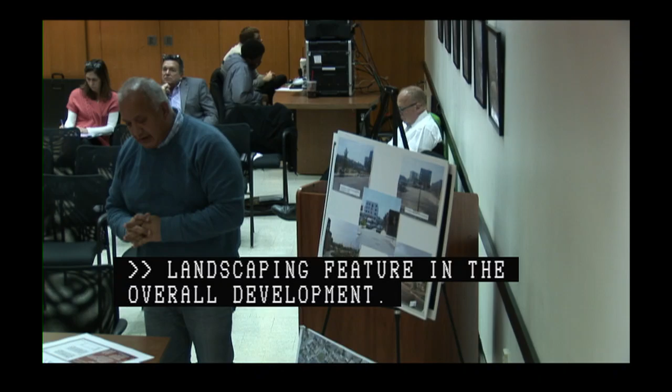The project is about $22 million. We have received city and state funding for the project. We are currently at the CD phase of our architectural plans. We expect that we will be able to complete those within a month or so. We expect to be selecting a general contractor within the next couple of weeks, at which point we would then look to apply for a building permit.

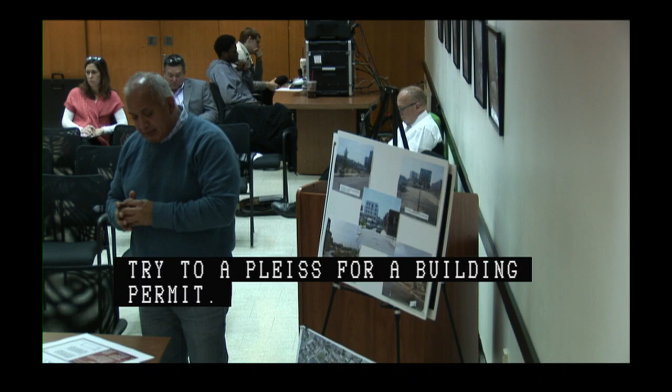As I said, the financing has been committed to the project. We need to do a closing, and we would expect to be able to enter into construction Q1 of next year, or beginning of the second quarter with regard to that.

I think with that, I'll turn it. The pictures which you are showing in this document, are those buildings representative of the type of buildings you are hoping to build? Actually, I'm sorry, these are actually, that is the Phase 2 building.

And I know you are trying to maximize the limited resources that you are getting, but there are some very good architects who can help you add a little bit of personality to the facade so that it doesn't look like a cinder block system. It is definitely not cinder block.

We have a fiber cement facade, and we're going through a process now with the City of Boston Department of Neighborhood Development, and with the BPDA on the exterior site. We also went before the Boston Civic Design Commission and benefited from their comments. So what you see here is a view of the building from the Gurney Street side, and from the plaza side, as if you were looking from the MBTA station across the site.

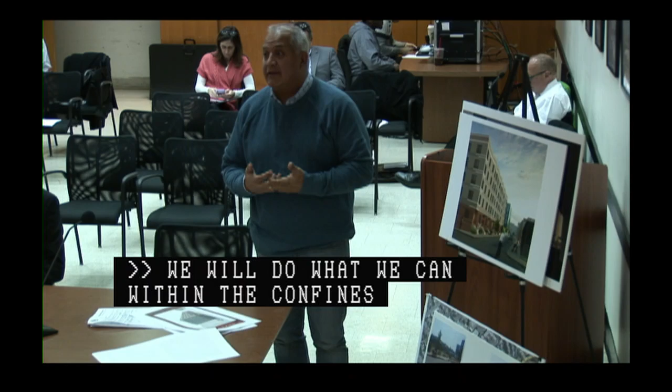We will do what we can within the confines of the budget of an affordable housing project. As I mentioned, we've done work across the street. This side is owned by the MBTA, and the sidewalk there is actually in good shape. The sidewalk that's in rough shape is actually here and around the corner on Station Street, and we will be rebuilding that as part of the project.

This is a very helpful overview. Can you walk us through the specific repairs being proposed? I'll walk you through what we're proposing for specific repairs along Gurney Street.

Along Gurney Street, we have staircases extending down from the building. The building is offset by 6 to 8 feet, and staircases extend down from these units pretty much right up to the property line. So we have about 6.5 feet of concrete, a combination of concrete and proposed paving strip that we're currently proposing.

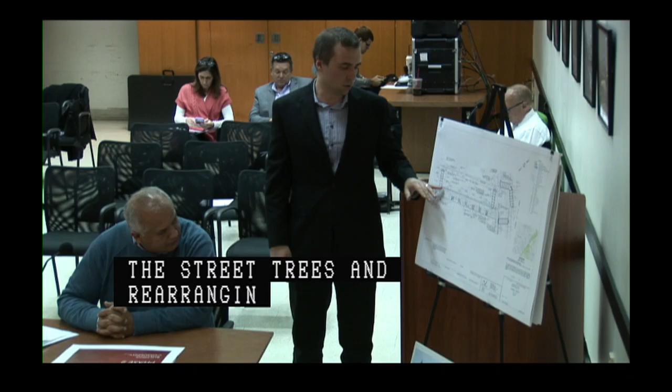When we initially came in, we had a proposed paving strip that went all the way through, with some trees, but through discussion with BPDA and the Mayor's Commission for People with Disabilities, we discussed eliminating or rearranging some of the street trees to allow a straight path of travel. So we're currently proposing a street tree with a pervious paving strip here, and exploring options with BPDA and the Mayor's Commission on Disability and our design team to keep the character of the street while coordinating as we move forward.

So concrete sidewalk all the way through. We have curb ramps extending across right here, and because all of these are currently apex ramps, we're proposing to reconstruct them as perpendicular ramps at these intersections. At this apex ramp, the building comes right up to the corner, and there are utility grates right there, so we're proposing to put in a tactile warning surface, reconstruct according to code, and have perpendicular ramps everywhere else.

Quick thing on this - the ramp on the Tremont side, Gurney Street, and the one on the Southwest Corridor side of Station Street - neither of them line up with a clear path of travel. Is there anything that can be done to bring the Station Street one closer in line with where pedestrians are headed?

To further what the chief's saying, I know when you design engineers design these crosswalks at an intersection, you're trying to balance ADA requirements of 90 degrees. But think back as to why it was 90-degree - that was when all our intersections were like this. So you need to use some engineering judgment to ensure the crosswalk is actually in line with where a pedestrian needs to go. Since Boston has a lot of skewed intersections, you may need to apply for a variance to support an apex ramp - we need to do the sensible thing. I hate to be pontificating, but we seem to be churning out crosswalks that no one is ever going to use.

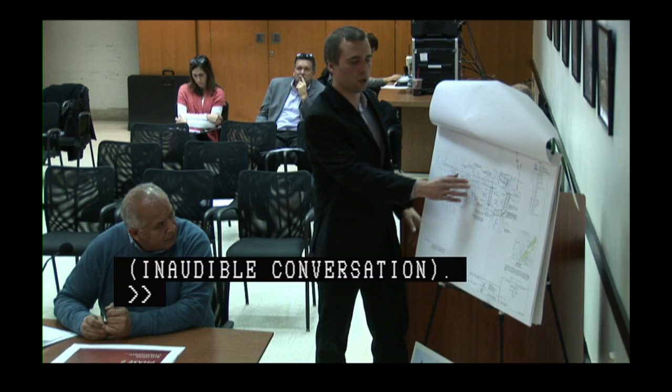Take a look at it. Along Station Street, we have an existing 22-foot curb cut that provides access to the temporary lot constructed as part of Phase 1A. We're proposing to reconstruct and change the grades a little bit, but use that same area to provide access to the garage underneath the building. We're also proposing 7.5 feet of concrete sidewalk here, and an additional 24-foot wide curb cut providing access to the temporary parking lots with an additional 26 spaces.

As far as improving travel for everyone along these roads, we're going to reconstruct the sidewalk along here, connecting those two ramps, and providing revised curb ramps to provide access at these other intersections. Does that garage entrance allow for off-street loading?

Or is this the height? No, as part of this phase we're actually going to be building a temporary parking lot a little further down the site, closer to the end of Station Street. That's where we'd expect to do the loading, offloading, and trash pickup. At some point, when the full build-out of the project happens, it'll actually happen closer to the end of Station Street on a designated way we'll build for servicing and those kinds of issues.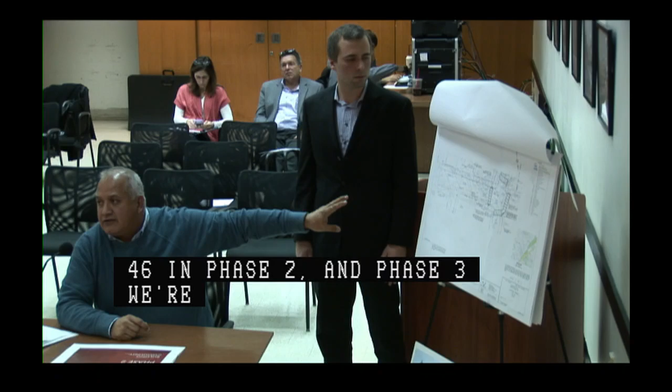Under a full build-out scenario, how many units will be there? Sure - we've got 40 units in Phase 1A, 46 in Phase 2, and in Phase 3 we're currently proposing about 80 units, mixed-income condominium. So 160 units total - how many on-street parking spots are you proposing, keeping in mind you're close to a police station?

How many off-street? On-street. No, on-site parking spots. We've got 29, and I believe ultimately we will need a total of 46 spaces to remain compliant with the approved PDA.

Is Phase 1A addressed off of Tremont Street, or off of Gurney Street? It's actually a 1 Gurney Street address - that's the official building address. It does have 1419, 1417, 1415, 1413 on Tremont Street, and 1411, which is actually on the site, is the Metro Housing Boston space.

This may not be something we want to get into, but with Park's earlier question - is anybody addressed off Gurney Street when it takes a left, that one block stretch? I think it's a one block stretch essentially between Tremont. Sorry - it's only ourselves currently, and the senior building. And it takes a left before it hits Parker, is that what you're talking about?

Essentially, similar to Tremont Street, Gurney Street takes a left in the middle of the block, the same way Tremont Street takes a left. We could also think about getting rid of that and having a different name for the street, so we don't have a street that takes a left - it goes one block and takes a left. The issue is we have a street intersecting itself - Gurney and Gurney. What is it then? Okay, never mind, we didn't need to get into history.

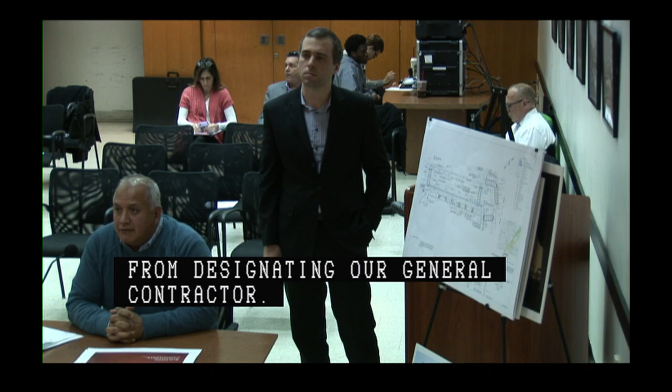And construction management plan, where are we in development of that? We're about 2 weeks away from designating our general contractor. Once we do that, we would like to involve them in the process of doing the construction management plan. It's very likely that it will be the same contractor that did the work on the Phase 1 site, so they're very familiar with the site, very familiar with the area, and should be able to work with that.

Other questions or comments? Todd or Avi? Good. Members of the public? All right, see you guys in 2 weeks. Thank you so much, well done.

All right, our next item of new business is East 8th Street, East 9th Street, Mercer Street, Reverend Richard A. Burke Street, Patterson Way, and South Boston pedestrian easements with repairs on a set of joint petitions by Old Colony Phase 3B4 Limited Partnership, Old Colony Phase 3B9 Limited Partnership, Old Colony Phase 3C Limited Partnership, and the Boston Housing Authority.

Good morning, everybody. Thank you to the Commission for having us on the agenda today. I'm Darcy Jameson, I always get here and feel like it's Groundhog Day. I'm with Beacon Communities Development. We're the development partner with the Boston Housing Authority on the redevelopment of Old Colony, here with Dana Dilworth from the Housing Authority and John Schmidt. I think, as the Commission knows, we've been working diligently over the past 10 years under the master plan to redevelop Old Colony. Phases 1 and 2 are done.

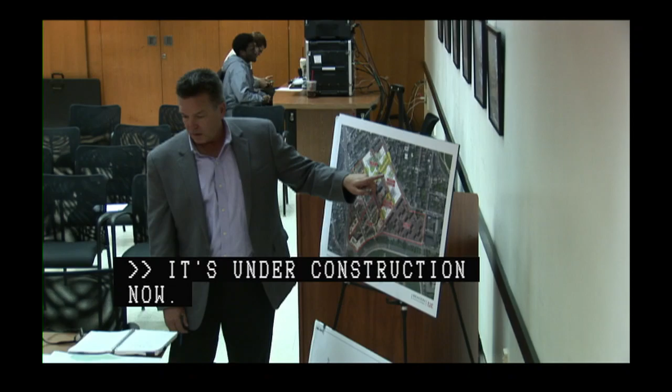Good morning, John Schmidt, Nitsch Engineering. So Phase 3A is the component that was approved previously and is under construction now. Phase 3B is bounded by Patterson along this side, East 9th Street here, East 8th Street here, Mercer Street here, and then this is 9th Street here. John, can you point out A and B? Right, so A is this component here. Phase 1 and 2. All right.

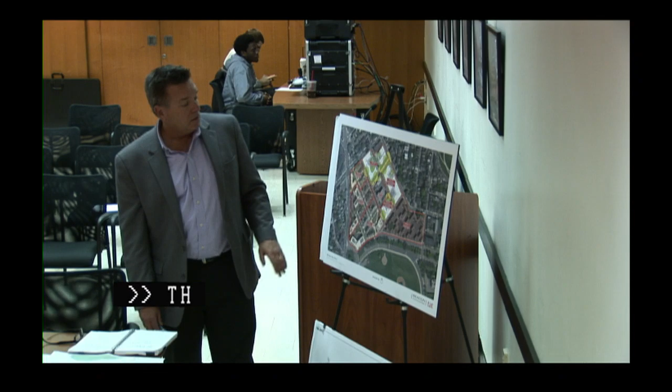Phase 1 here was built back in the early 2000s. Phase 2C was around 2008-2010. This Phase 3 is now in construction, 2018-2019. 3B and C are the phases before you today, and construction for this will start in 2020. We've carried the same design components through each phase, with concrete sidewalks, street trees where there's room, and new streetlights, so there'll be consistent streetlights throughout the entire program. We are reconstructing the sidewalk in front of Perkins School as part of this project, so when we're done we'll have a completely new sidewalk through here, as well as down East 8th Street.

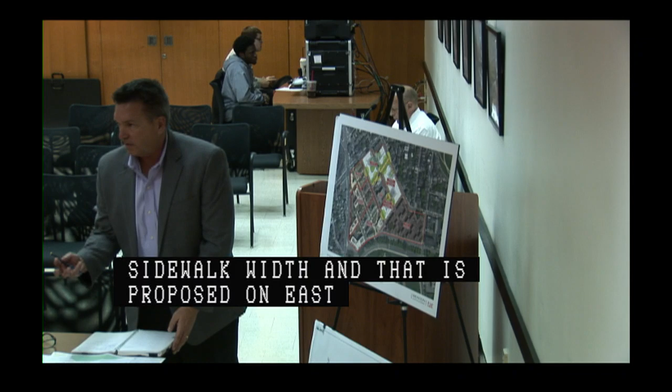Part of the application is we are asking for pedestrian easements in areas where we need them to provide the proper sidewalk width. That is proposed on East 9th Street. East 8th Street and Mercer will all have sidewalk easements in order for us to reconstruct the sidewalks in the manner appropriate for this use. If you'd like, I can get into the weeds a little more.

And these are all City of Boston streets, not BHA streets, correct? Correct. And you are looking after all of it, right? Yes, basically the work John is outlining here is what is outlined in the approved PDA plan. So, meaning you will build the buildings and build the roads and do whatever needs to be done - it's all yours, right, Ms. Jameson? In accordance with the approved PDA plan and what John's articulating now.

So on Reverend Burke Street, between Patterson Way and Mercer, this is where the school is. We'll be reconstructing the sidewalk there. We're not proposing street trees or that sort of furniture because it's a heavy area for drop-off and pickup. In front of the parcels we are building on our own site, we are constructing sidewalks and putting new streetlights that complement the project. The streetlights on this section in front of the Perkins School are already installed and complement the design of the neighborhood.

And obviously, as we talked about the CMP, I mean the sidewalk work in front of the school - I would foresee that being done during the summer? First week of September. We haven't gotten to that level of detail, but I'm going to make a note and we'll make sure we think that through.

I've had many dealings with the headmaster over there. I'm sure you have too. Yeah, and I've actively emailed him and called to try to keep him in the loop and make sure he knows we're available if he's got any questions, and been checking in with his staff when I'm on site to just say, is everything going fine? And our superintendent at 3A has introduced himself to them. So I haven't heard anything. Happy to address it if anybody else has.

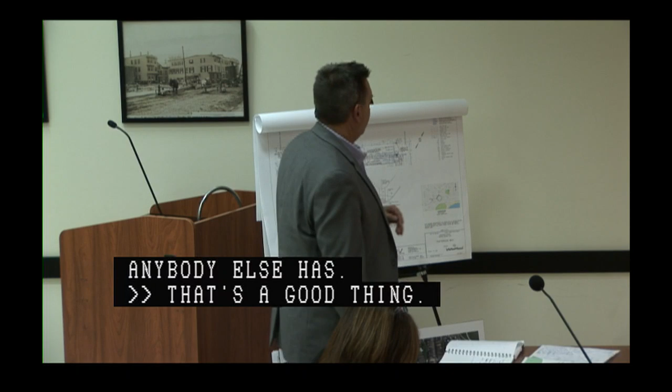East 9th Street runs through the center of the project. Here we are constructing new sidewalks, new curbing on both sides, new street lighting on both sides, and installing street trees where there is space available that's not compromised with utilities. We also have pedestrian easements proposed here in order to provide the sidewalk width.

John, just from a summary perspective, all these sidewalk and urban design details are a consistent vocabulary that has been approved throughout, all of us, going back to phase 1. And you are assuring us that there are no hiccups or any variations to any of it. No, we've maintained the same design component through each phase. Makes it a lot easier on our part. Yes, us too.

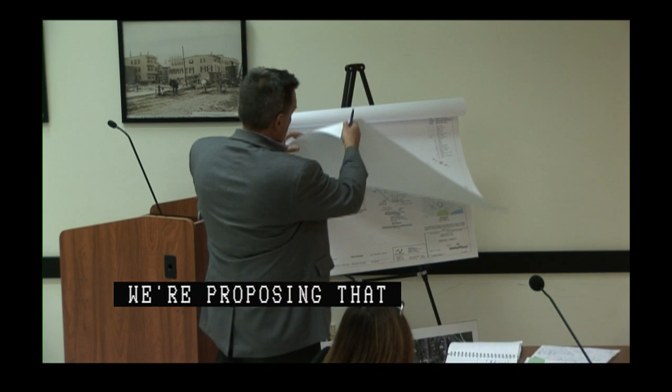East 8th Street, similar scheme: reconstructing the sidewalk, installing street trees, installing street lights. We are also proposing a pedestrian easement, 8-foot sidewalk, 5-foot path of travel. And then on Mercer Street, same deal: new sidewalks, new street trees, pedestrian easement, 8-foot sidewalk, 5-foot path of travel.

Any of these raised crosswalks? No, everything's the conventional crosswalk. We're having a conversation about particularly whether it's turning onto Mercer, turning onto Patterson, whatever the secondary streets might be, whether that's an appropriate traffic calming device, and just taking a look at that.

Are you asking us to investigate whether we want to work with the Boston Transportation Department's active transportation group? They have received petitions citywide where people are asking for slow streets, plus the DCR roadway, Day Boulevard. We put speed humps over there but they are going to be taken out. So if speed is a concern, you may be in an interesting place where the city may be supportive of putting well-placed, properly positioned speed humps. That's active transportation and engineering.

Is that something we should try to resolve in the next two weeks, or is that something we can start the conversation on? Start the conversation, yes, and we'll get there before construction. So that way, Darcy, after you're done, your nice guests won't be coming to us saying 'do something.' Understood, thank you. I think it's a good thing to look at now.

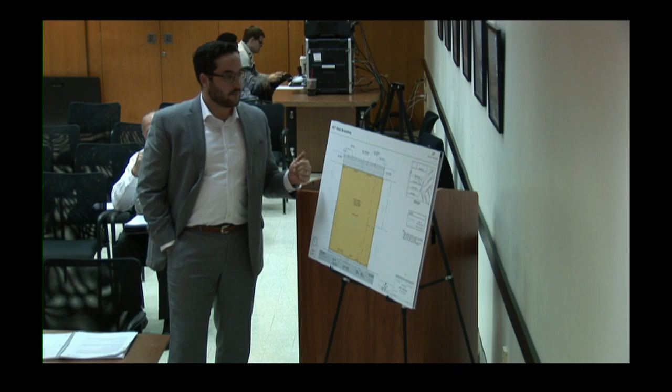The specific repairs along West Broadway: we're removing and resetting the curb, and reconstructing the sidewalk. There's an existing street tree there that is to be protected and remain, and we are adding another street tree, not removing any. We're adding 5 bike racks in total, and the pedestrian pathway continues to Silver Street.

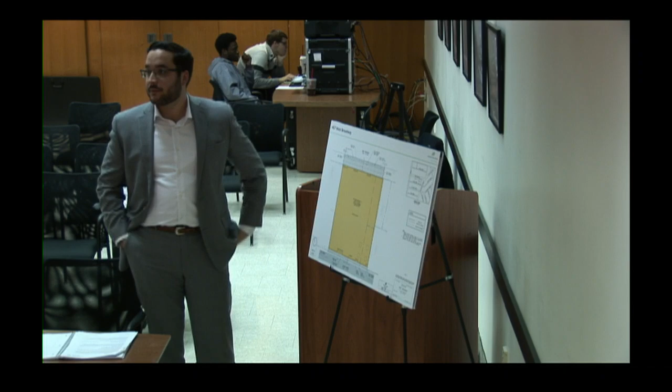Robert, before you go there, the scoring patterns for the concrete sidewalk on West Broadway, is it matching on the other two sides, or are you introducing a new scoring pattern? There's a little bit of detail here I'm not sure is a drafting issue or whether you actually want to score the concrete that way. I'll have to confirm with the architect, but I'll make sure. Also for the public hearing, could you bring us a photograph that shows your project, so we will be in a better position to understand what we are evaluating. Absolutely.

Moving on to Silver Street, we have reconstruction in the sidewalk and removing and resetting the curb. We are also calling for a modification to the existing curb cut into the parking garage access on Silver Street.

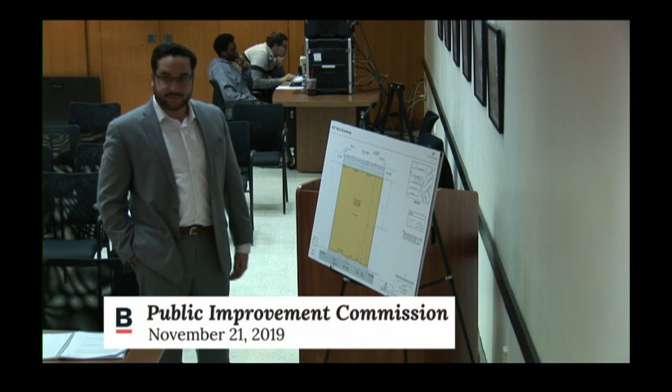Can you comment on the curb cut closer to Dorchester Street? It seems to overlap a bit with a door coming out. The dashed line is the proposed, the solid blue is the existing; the dash extends past that, so right in front of that doorway will be removed. You need to adjust the drawing so it shows the new curb cut properly rather than just an opening - it could be somewhat misleading.

We got input from the disabilities commission, they wanted the driveway curb cut to provide consistent accessible access, so that's why we have the straight transitions. Get your drafts person to fix that.

In addition, we are retaining the existing street lighting here. And of course, we are petitioning for a pedestrian easement. Right now, from the sidewalk to the property line there's 3 feet, and from the property line to the proposed building, we're asking for 3 feet.

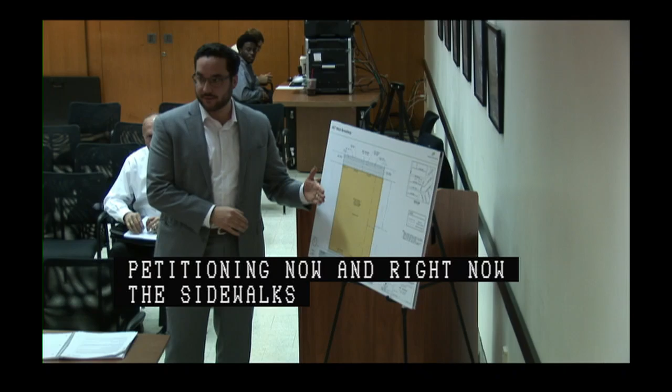I'm sorry, I have to ask - is this an existing building you are tearing down? This is an existing building, the old Family Dollar store location.

So it's a new building. The two buildings to the immediate left and right, what is their height compared to yours? To our left from Silver Street, it's 5 stories. To the right, they're all roughly about 5 stories each - I think the one on the right might be 6 stories. So there's a sense to the massing. Yes, they're on the same scale.

Are you going to have any balconies protruding onto the sidewalk of West Broadway? No, sir. So you will maintain the building facade as needed? That is correct.

This may be a question for Todd, but the resulting sidewalk on Silver Street will be 6 feet wide, correct? Is that the standard, as buildings come down on Silver Street? We don't have a ton of development on Silver Street, but we're trying to maximize it as best we can. Down in South Boston we're not going to get to 8 feet - Sarah will appreciate every inch, right?

One additional note on Silver Street, we have recessed the doorways so they do not open into the pedestrian path. Thank you, sir. You're welcome.

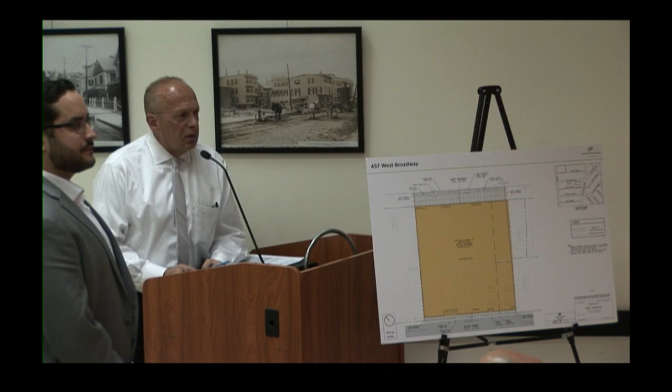Part of the mitigation in the TAPA is a monetary contribution to assist with improvements at that location. Funds will be paid to the BPDA at the issuance of a building permit.

For signal design? No, it's whatever improvements are needed - a design for whatever improvements. You just submitted it yesterday, right? Correct, we may make some modifications. That's fine. Understood. Amy, you can check it out - I CC'd you on that.